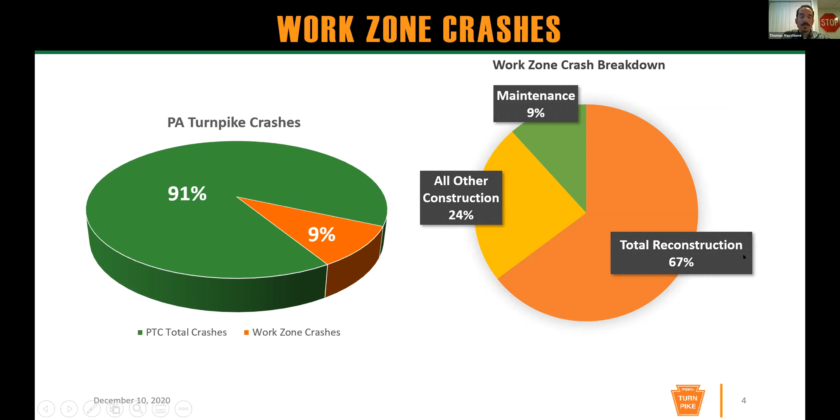We can do this by minimizing exposure to the motoring public through several ways, one of which is improving our operational efficiencies - improving how we set up and tear down the pattern, consolidating efforts, combining efforts of maintenance and construction so we're not having separate patterns in the same general area. Also eliminating any excess or unnecessary work by speccing better products that will last longer and prevent us from having to go out there on the road.

Also limiting operations to times of day when historically traffic is lower. So in a lot of our areas, this would be nighttime work. It does cost something, it costs more, but it increases work zone safety if there's less people on the road traveling through the work zone.

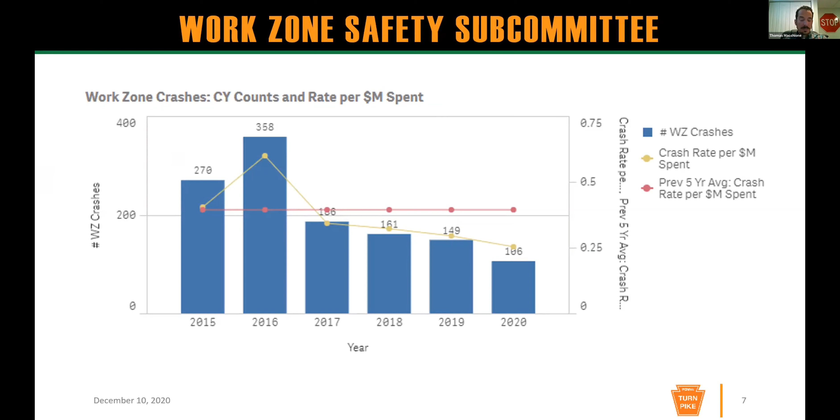This screen here shows our work zone dashboard. This is something that we created in the last year, and we have multiple parts to this. The first phase, which we started first, was a live dashboard that had a map. It shows a map of the whole state, where the construction projects are, whether they're contractor or maintenance, and what type of work it is. It's a direct feed from our ENS system, and it shows you live, up-to-date, where the work is and what's going on.

We incorporated what you see now as our crash statistics. This is what we look at on a monthly basis in our work zone safety subcommittee. So we're looking at crash rates, TMA hits, how many crashes per $1 million spent. We dive into specific projects, and this whole dashboard is interactive, so you can click on things and do filters. What's nice about it is you can dive into one project if you have a specific project you're interested in and want to find more out about where the crashes are happening, or what's the prime crash factor. So this has been a very useful tool.

And then moving forward in 2021, phase 3 will be adding the automated work zone speed enforcement to this dashboard, as we've had that in place for about a year now.

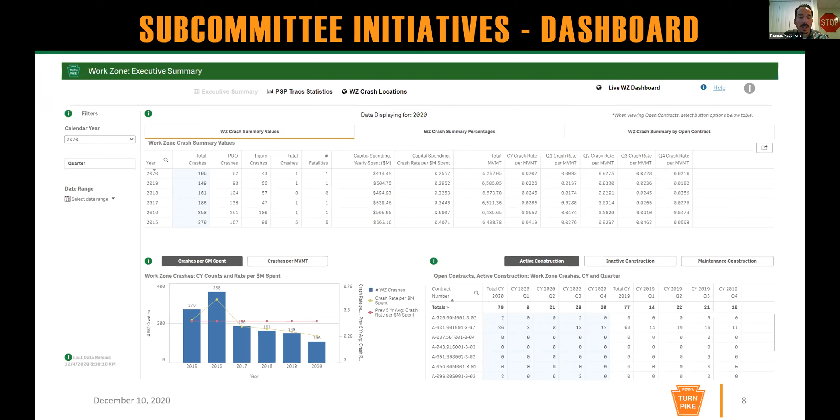We also look at our TMA hits. Our TMAs are truck-mounted attenuators. They're basically a shadow vehicle that has a crash cushion on the back that's designed to take an impact, and it's our last form of defense before the errant vehicle would get to the workers. In recent years, we've seen an alarming rate of these TMAs getting hit, largely due to distracted driving.

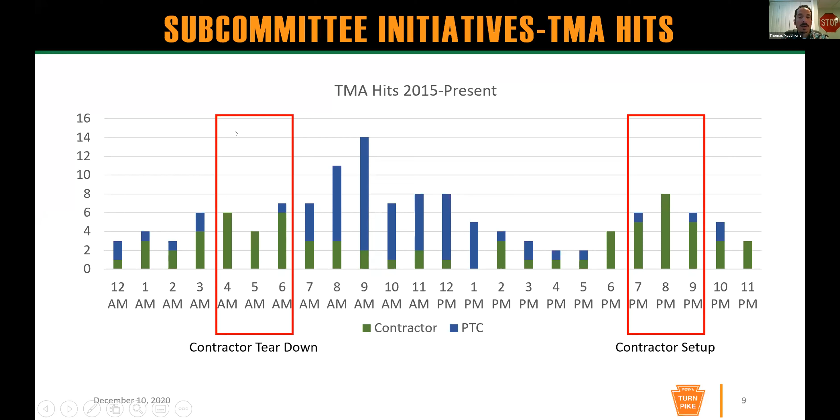So we looked more in depth at when these TMA hits are happening, and who, as contractor or maintenance, is setting the pattern. You can see the contractor set up and tear down - when they're setting up and tearing down, we see increased TMA hits. That's when they're setting the pattern or removing the pattern, while the TMA is out there. They tend to be later in the evening or early in the morning when they're setting their pattern, since they do more night work. Our maintenance crews, on the other hand, are working more like 8 to 2. So you can see, again, when they're setting up the pattern around 8 to 9 a.m. and removing it around lunchtime, noon to 1 time frame, that's when we're seeing our TMAs get hit.

Once they set the signs on the left, they would turn around at an access gate or a maintenance shed, an interchange, and then come and set the signs on the right and then take the lane. So you can see it not only was increasing exposure in the left lane, but it took longer for them to set this pattern, sometimes almost an hour to set up and an hour to tear down because of this loop. Some of our access gates are 5 miles away from the work zone.

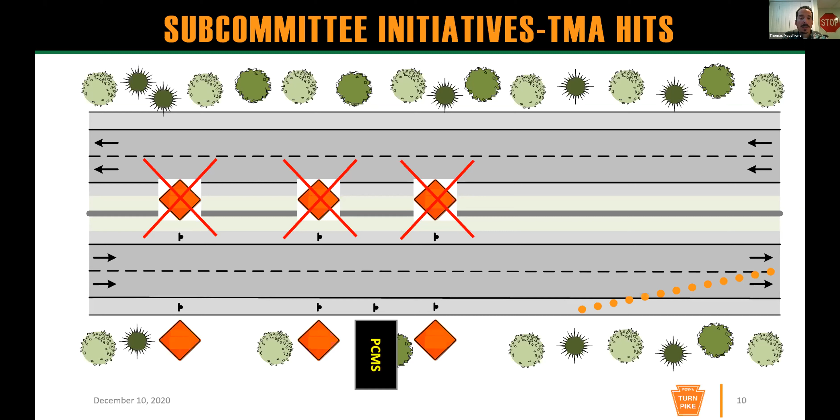So we worked hard over the last few years with FHWA, with PennDOT, and I know they're issuing their new 213, which will have some of these details also. But we initially eliminated the median signs in narrow medians. These were areas where the median was very narrow. It was unsafe to put a sign in the median to begin with, which a lot of the turnpike being built in 1940 has a narrow median, a 10-foot median with a 2-foot barrier, and then it allows for 4 foot to the yellow line.

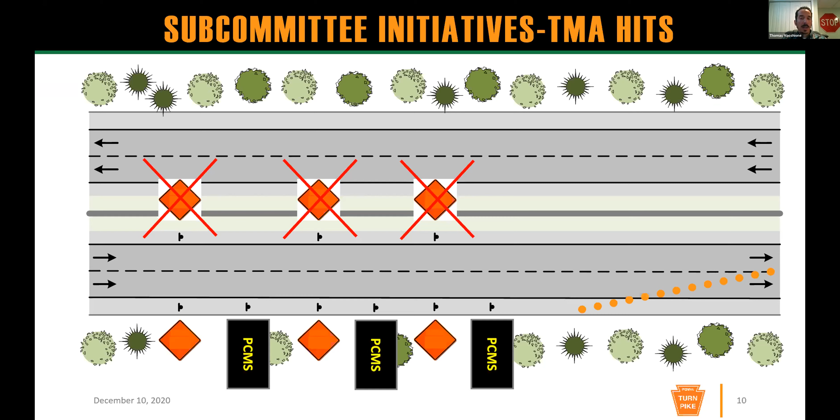So what we did was we eliminated the signs on the left and we added 2 PCMS. So as the customer would see, come into a lane closure, they'll see 3 PCMS indicating that the right lane is closed to merge left.

And you can see here, we implemented these changes first in 2017. 2018 was probably the first full year where we saw the benefits of this, and we went system-wide as well. After we piloted this in narrow medians, in 2019, we made it the entire system. So no matter if you have a narrow median or a wide median, removed the signs on the left.

You can see the drastic decrease in TMA hits. We did have a small spike here in 2020, and that was back in the spring, mostly maintenance operations, mobile operation in the left lane where they were doing sweeping and medial ops. So we actually suspended maintenance and other activity there until we could figure out what to do to prevent these. We actually added to our standard an additional PCMS on the right-hand side to let customers know that the left lane is closed ahead, just to get them to move over.

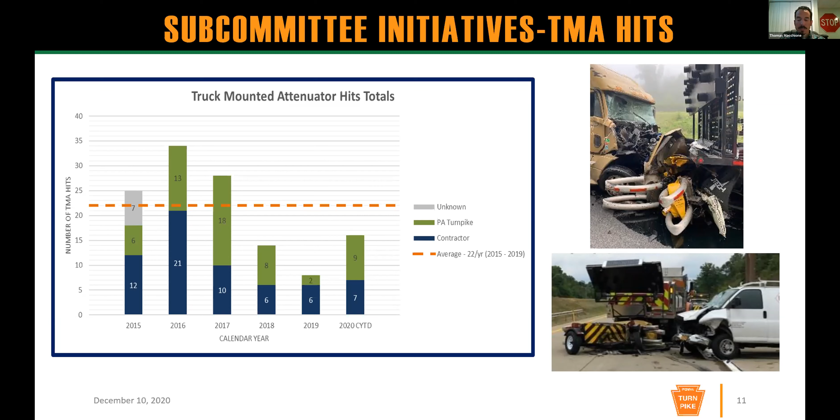So to do this, we have the two main stages. Now, the first stage, we maintain traffic in the existing 12-foot lanes. Stage 2 is our more challenging phase. So this is where we shift traffic to the outside. We maintain the 12-foot lanes, but we're in a narrow, what we call a cattle chute area with no shoulders. So we have barrier on both sides or guide rail on one side, and we paint the lines right on the barrier.

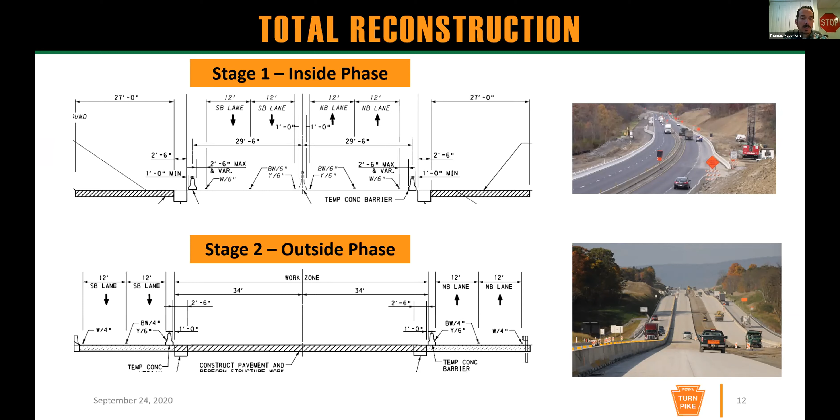This actually becomes very challenging to try and assign this to trucks. So trying to get commercial vehicles, which are now restricted in stage 2 to the left lane only, to be in the appropriate lane. So here are some things which we worked on through the Work Zone Safety Subcommittee, some initiatives to help get the message across to keep trucks out of the right lane. When trucks are in the right lane, things like them hitting the guide rail or getting hung up on the guide rail and crashes with what we call Plan X or turnpike closure occur. So we did extensive work here to try and get the trucks in the left lane, and you can see some of the things we did here.

We added overhead symbol signs to get the trucks in the left lane. We reached out to PSP to get them to help assist by sitting in the work zones.

We actually worked on getting a color portable changeable message sign, you can see on the far right there, with the same symbols. We put down pavement markings in our A31 to 38 project, on the northeast extension between Lansdale and Quakertown, again with the truck symbol sign, and we also used CB Wizard radio. So as the truck driver is driving down the road, they'd broadcast on their CB Wizard radio and tell them trucks, buses, left lane only, and which milepost on the turnpike. So in case they didn't see the sign or couldn't read the regulatory signs for whatever reason, there's an audio message also.

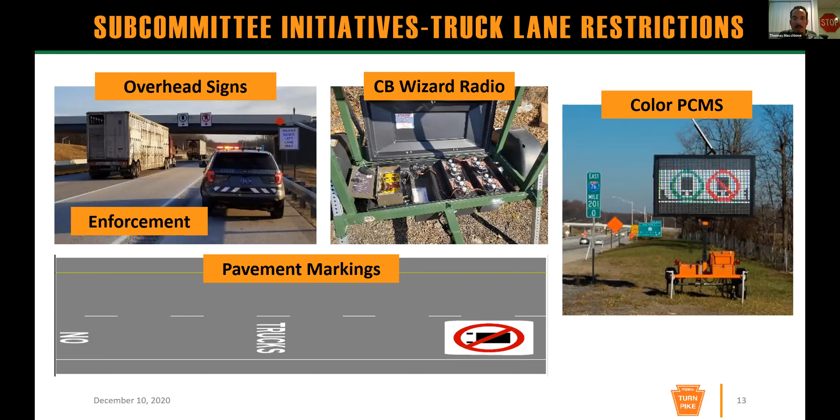This slide shows some challenges we also had in our total reconstruction project. This one was our 202 to 206 project. What happened was the trucks, as they came into the work zone, shifted to the outside for stage 2, and they were consistently hitting this guide rail. So much so that we had to close the road down several times, not just for accident recovery, but for guide rail repair.

Because we're in the cattle chutes here, to get the equipment out there, the post pounder, and put those panels back in, it's too wide to even maintain a lane of traffic, so we had to close the road down sometimes for extended periods of time. And the detour in this area was not desirable. It was from Breezewood to Carlisle. So you can see it's a long detour, and we lost toll revenue.

So we worked on, what you see on the far right there, putting temporary concrete barrier on the right-hand side. Once we did that, we noticed the crashes, we actually didn't have any more crashes in this specific area. We had some scrapes, but the tractor trailers just kept on going. They didn't get caught in the guide rail, it didn't close the roadway.

And what we did because of this, we actually added this to our design consistency guidelines, and we're putting this in our new set of reconstruction projects. We have guide rail on the right side. When we shift into the project for the first 500 feet, we're replacing that guide rail with barrier. And if it happens to be a curve on the curve alignment there as you approach the work zone, we're carrying that through 500 feet through the point of tangency. So the thought is to prevent the crashes from occurring, keep the roadway open. And even though we had quantities in there for guide rail replacement, it's saving the commission on that cost as well.

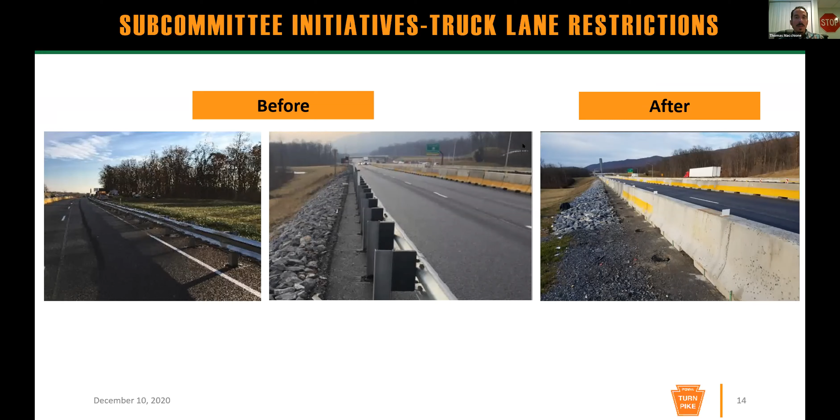Some other things we're looking at for our total reconstruction projects, you can see we put in temporary snaps, these are rumble strips on the right side. We had some issues with our CMVs, the commercial vehicles, driving off the roadway completely, so we put those on there to help keep them on the road. We also put in increased delineation, what we call the candy cane delineation, the orange and white striped delineation, to help delineate the shoulder there so the trucks wouldn't get stuck in the mud.

We also put down durable pavement markings, polyurea, through the work zones to help give wet night reflectivity. And then we put speed display signs. We found that speed display signs can help decrease speed through work zones about 3 miles per hour. So we put 3 of those in advance of our projects, and added to our specifications to have them spaced every 2 miles throughout the project. So if it's a longer project, they're not going to get in the work zone and forget about their speed. We're going to remind them constantly as they're traveling through our work zones.

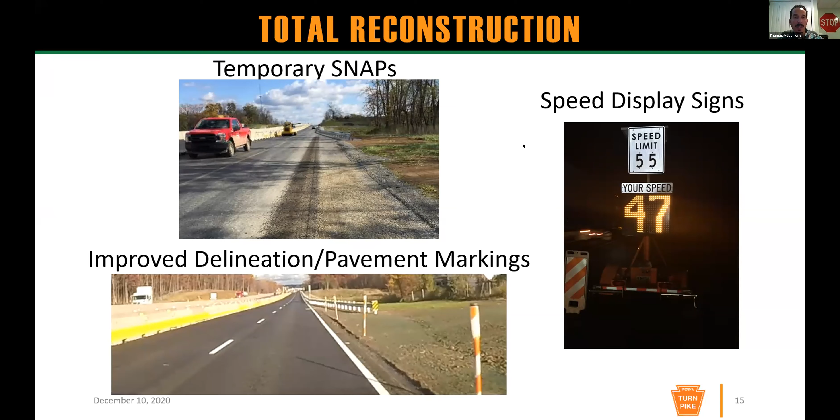Some technology initiatives: we've worked with our navigation apps. We have an agreement with Waze and Google, and we're displaying our work zones in those apps. The Haas Alert is a pretty cool tool, I know Todd Lease mentioned this yesterday. It's basically on our emergency responders or work trucks that have this device, and when they activate their amber light, it sends a notification right to Waze. So immediately, anybody using that app will get a notification that there's a slow-moving or stopped vehicle on the roadway ahead.

ATMS integration, what we're doing there is integrating with ATMS. We're changing our ENS system over, and this will help us get all of our work patterns entered appropriately so that we can get our message boards turned on and utilize our DMS effectively and coordinate with our smart work zones in specific projects moving forward.

And on the far right, you can see our tunnel Swiftgates. If you haven't been through our Tuscarora tunnel project yet, you need to check that out. They're automated gates that swing open and close the lane. Basically, it helps increase operational efficiency and preventing boots on the ground. We have that condition Sunday evening through Friday around midday at Tuscarora Tunnel, so if you drive there through the week, you get to see that in action.

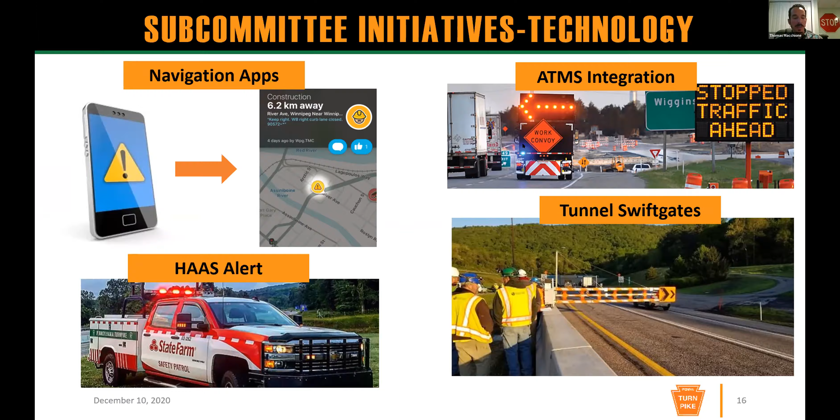More initiatives we implemented: the LED hard hat light there on the right. We issued this to all of our maintenance employees. They wear this at nighttime, and it provides 360-degree visibility to our workers.

We also implemented, on the bottom right there, a sequential cone light. We have these specific lights for our cones in our maintenance patterns, and we also use them on our channelizing devices for our contractors. At nighttime, it lights up the taper, and since it's sequential, it encourages an early merge.

On the bottom left there, you can see our work zone safety memorial. We take that around to different events, and in the center you can see it was at a Penn State game in 2019.

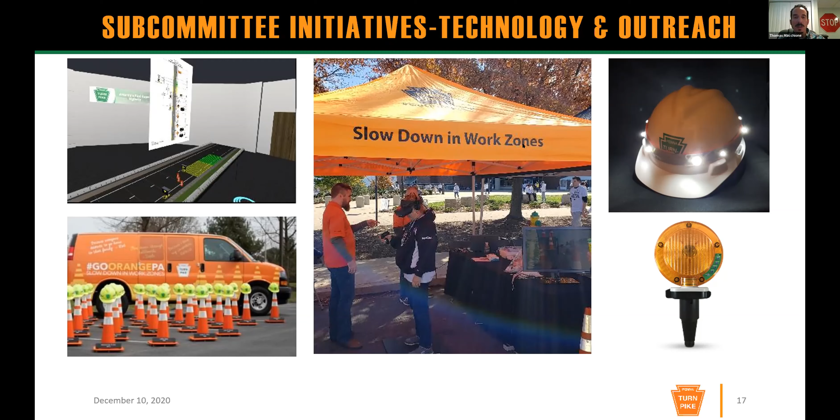We also showcased our virtual reality training, which covered MPT standards. We actually allowed customers to experience what it's like to set and remove cones, so they can understand the exposure our workers go through daily.

I'd be remiss if I didn't mention this: automated work zone speed enforcement has had a big effect on our work zone crash rates. I won't go further into this because Hannah and Ben will touch on it later in the session.

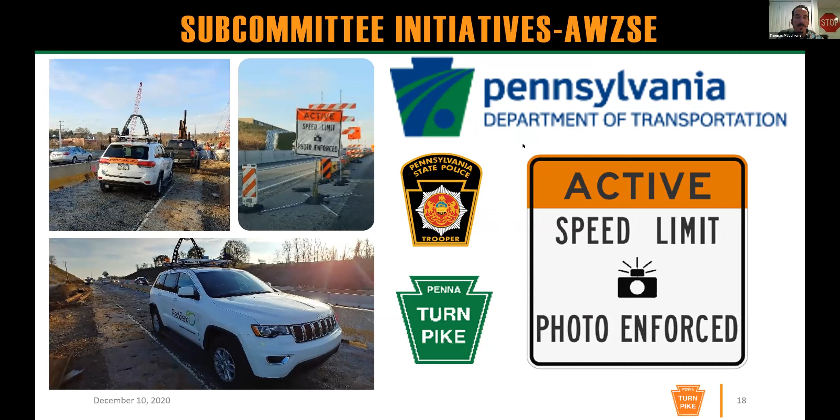Some things we're continuing to work on as we move forward: milled and uneven lanes are something we'll look at further in the next calendar year. We made changes to our standard drawings to show message boards in advance of the milled or uneven lane, and we allow a 2-inch drop-off going into the uneven lane situation.

So we're telling motorcycles which lane to be in—they're probably the biggest customer we need to notify of uneven lanes, but we notify all customers which lane is milled, encouraging them to stay in lane through this condition. Speed limits are reduced to 55.

Moving forward, we're looking at other ways to minimize our exposure in uneven lanes. One option, in areas with high traffic volumes, is requiring the contractor to pave whatever is milled out the same night in our through-lane sections.

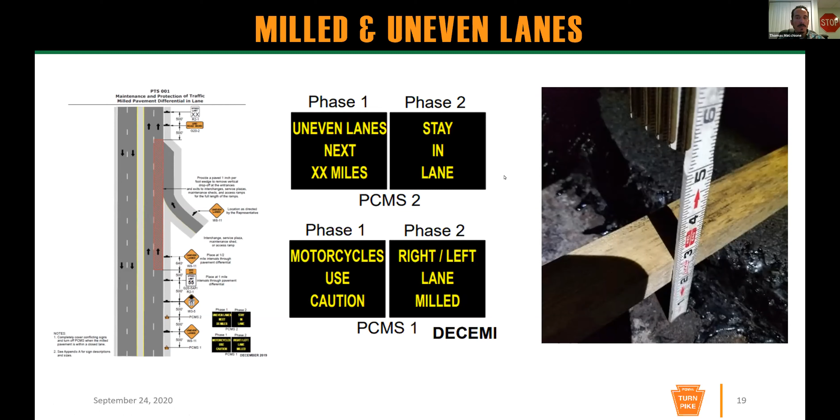Tunnels are another area we're looking at. This can be very tricky. We reduce our speeds, which are normally posted at 70—as you approach the tunnel we go down to 55, and when we go bi-directional crossover, we go 40 miles an hour in the tunnel.

Just to touch quickly on lessons learned, there's a number of things we've learned over the past 6 years, so I wanted to share those with the group. We definitely think the team approach is important.

Not just having a few individuals, but the bigger the group, the more ideas you come up with, both good and bad. You can have things you think are a good idea, and then somebody comes up with a reason why you shouldn't do that.

Focusing the meeting on a single topic has been a big help for us these past 2 years. Instead of having all these scattered ideas, having one single focus topic—like today we're going to talk about utility reconstruction and how we can make those work zones safer.

Adhering to the subcommittee's 5 core principles was big—knowing what our focus is and what we should be focusing our efforts on, and keeping an open mind to all improvement suggestions, no matter how big or small.

Our crash rates were reduced because of the accumulation of a number of small improvements. We created a process to track these improvements over the years to make sure we get them into design projects, and having buy-in and support from high levels of executive leadership is helpful too.

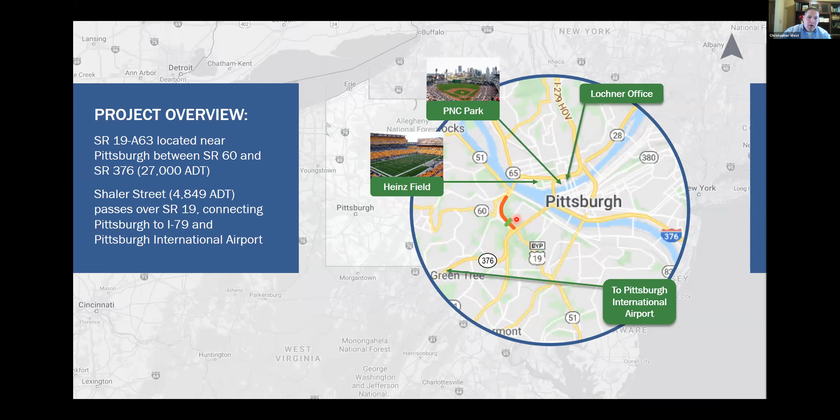The scope of the project includes roadway and structure improvements. The roadway improvements include full depth reconstruction of the 4-lane bifurcated roadway, improvements at the Wabash Street intersection where we extended the deceleration lane to reduce crashes, and replacement of overhead signs near Ramp C. We also made grading changes on State Route 19 southbound and Ramp C under Ramp A. The existing vertical clearance was about 13.5 feet, and both roadways have been lowered to give us the required 16.5 feet.

As I said before, the Shaler Street Bridge was replaced. The existing 3-span bridge was replaced using accelerated bridge construction techniques with a new 2-span bridge. The 2 spans were erected in the bridge staging area adjacent to the project and rolled into place using SPMTs.

There were two main goals on this project at the outset. One was to replace this bridge using only 2 weekend closures, one weekend to demolish the bridge and one weekend to replace it. Another goal was to maintain 1 lane of traffic in each direction as roadway reconstruction was completed.

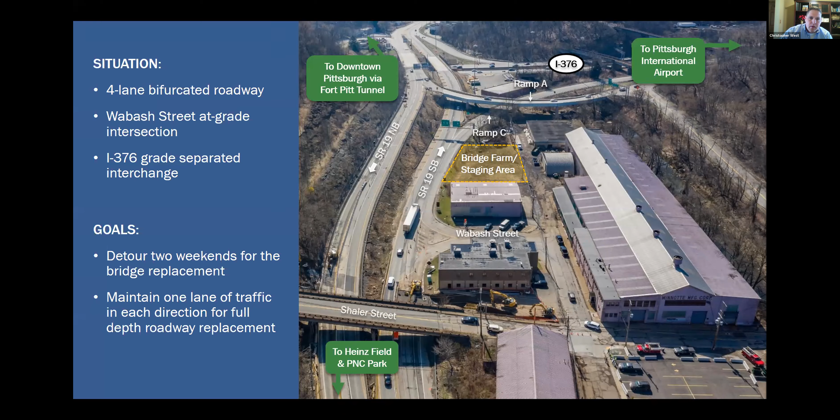It's important to understand that the success of this project was a result of a large team communicating, working well together, and demonstrating what can be accomplished with a partnering approach. There are many stakeholders to this project. During design, Lochner and subconsultant McTish worked with PennDOT to develop the traffic control plan. We met with stakeholders such as the City of Pittsburgh, the Sports and Exhibition Authority, and held public meetings. During each meeting, we discussed the scope and schedule of the project so that there were no surprises and everyone knew what to expect.

Our first example of vigorous communication is demonstrated in choosing the move day for the Shaler Street Bridge. The project was let in 2018, and we anticipated utility work through the winter with major construction beginning in the 2019 construction season. The project specifications did not allow for the bridge move to occur on weekends with special events, including Steeler football games, citywide races, Pitt games, or a concert at Heinz Field. The caveat for contractors during letting was that the 2019 fall Steeler schedule was not known at the time.

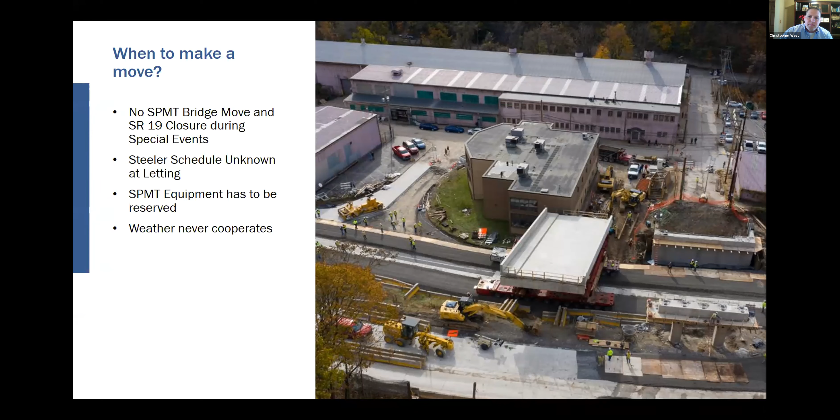During the bridge move, traffic was detoured through the west end. This provided the contractor all the necessary room to complete a large amount of work over a 2-day closure, including placing the bridge move path material, moving two 70-foot spans into place, removing all the stone used to make the bridge path, cleaning the roadway, and opening up to rush hour traffic the next morning.

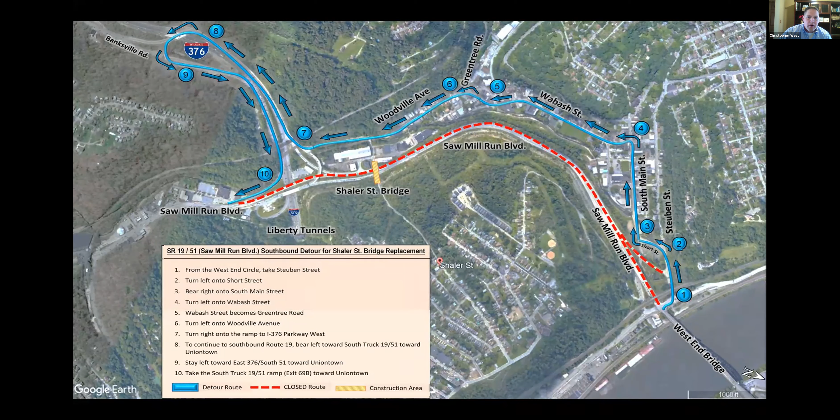So into the project control meeting we went. Folks in attendance included the contractor Swank, with Mammoet on the phone, PennDOT traffic, structures, public relations were all in attendance, along with Lochner, the construction inspection team, and the construction management team, as we came up with a plan for when we could schedule this bridge move.

Our first plan and the first available days that really showed themselves were 2 days over Halloween. We had a few unhappy parents because this was encroaching on trick-or-treat time, but we had 2 clear days in the schedule. Unfortunately, Mother Nature disagreed with this date. Winds were predicted at 45-mile-per-hour gusts, and we had to reschedule the move. Those predictions became true - the wind was very bad over those 2 days.

The second try was November 1st and 2nd. We knew the EQT 10-mile race was occurring in Pittsburgh on that Saturday, and we also knew that it did not use 19 as part of the race path. A little more investigation, and we found out that the race did use the detour route. So that weekend was eliminated as well.

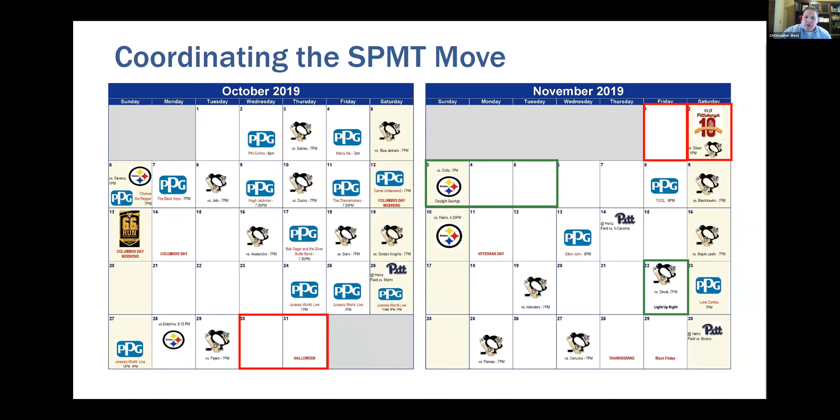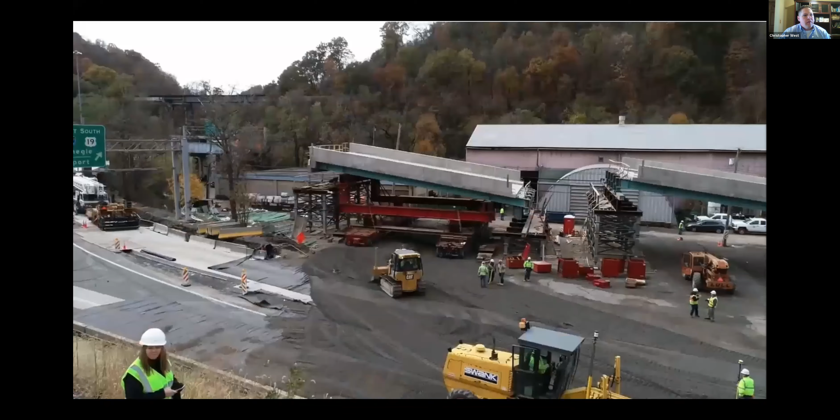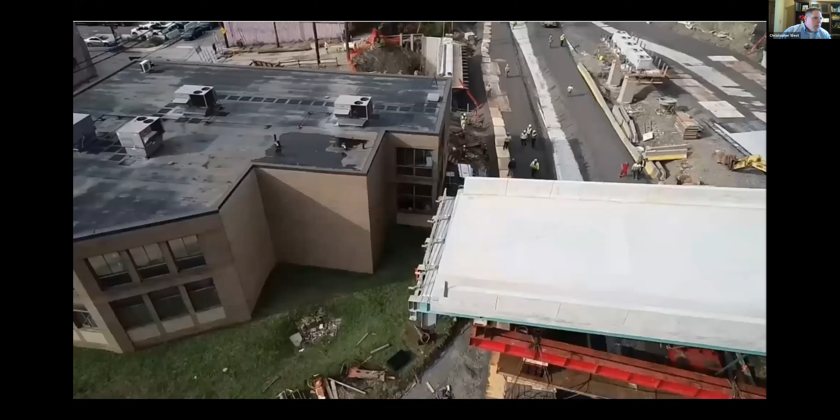You can see in this picture all the move path material that was necessary for the SPMTs to keep the structure level as they were moved into place. The first span they moved was span 2. These SPMTs move at about 4 miles per hour. You can see we had about a foot of clearance through some of the local buildings. Span 2 moved through span 1, past the bifurcated area, and then was moved into its final location.

Span 1 was moved the following day. During the move, State Route 19 was closed, and the contractor had plenty of room to perform the work. However, for the rest of the construction, project traffic operations had to be maintained with 1 lane of traffic in each direction.

Stephanie is here to tell you about some of the plan changes, new ideas, and discoveries along the way that made this project successful. Thank you, Chris, for walking us through that extraordinary partnering with an almost impossible schedule.

The successful coordination of the Shaler Street Bridge replacement using SPMTs over Route 19 typically overshadows the rest of the project. However, the majority of the traffic control plan was required for concrete reconstruction of just about 2 miles of the project.

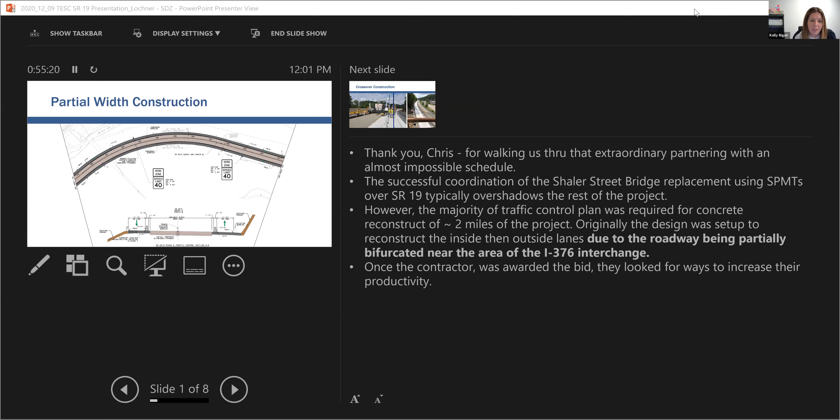Hey Steph, I'm sorry to interrupt, but if you want to switch your screens right now, it's showing the presenter view, just so you can get the right frame in the screen. If you want to maybe unshare or try - sorry to interrupt you. Technology, it's a beautiful thing. And there we have it, perfectly done. Thank you. Thank you very much, Kelly.

All right, so our original design was set up to reconstruct the inside lanes, then the outside lanes. This was entirely due to the roadway being partially bifurcated near the area with the Interstate 376 interchange. Once the contractor was awarded the bid, they looked at ways to increase their productivity.

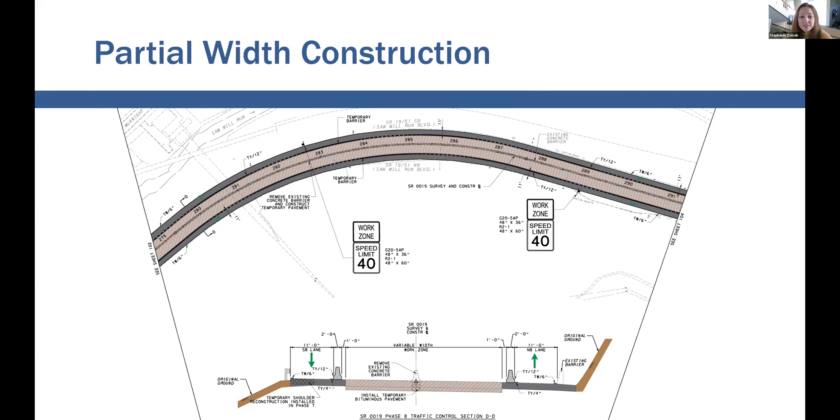The contractor acquired their own designer to propose a crossover in order to work on one side of the road at a time. The original designer and PennDOT quickly worked through multiple reviews and meetings without much time, since the construction clock was already ticking.

Finally, the contractor had received partial approval for the majority of the roadway reconstruction using a crossover. In the area of the 376 interchange, however, with the bifurcated area, the contractor had to continue with the original design concept. The partnering of our original designer, Lochner, PennDOT, the contractor, and their designer was tremendous to approve a modified traffic control plan so quickly. The 3 key benefits to this partnering effort were to keep the contractor on schedule, which was challenging, to allow the contractor to increase their efficiency, and they decided to slip form the concrete.

We also saw an increase for the safety of the workers, since the entire side of the road was closed off to traffic, and this allowed at times for the permanent barrier and the temporary barrier to buffer the workers from the traveling public, in addition to a greater offset from that location.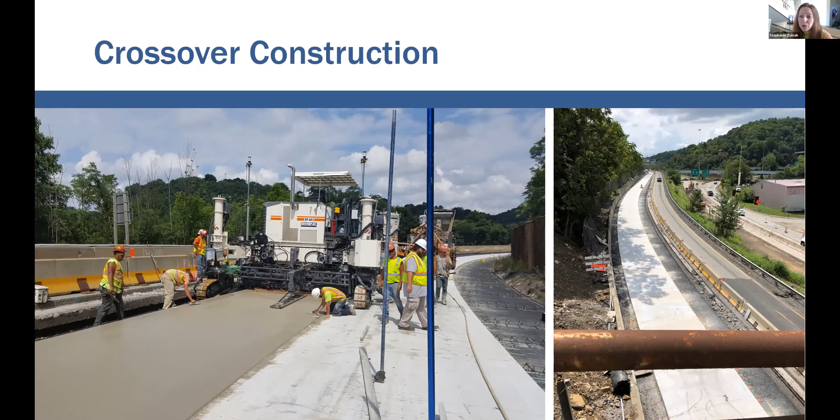Throughout our discussions with the contractor on this crossover, as you can see in the picture, they also wanted to close down Ramp C, which is the ramp that connects Route 19 to I-376, to complete their ramp reconstruction, and also for assisting in their full mainline crossover concept. We did not approve that full request.

So Ramp C, as you can see in the picture, is on the right. And as Chris had mentioned previously, we reconstructed this and lowered the elevation due to a sign showing a low clearance of 13 feet 6 inches. The above structure is Ramp A, which we were not replacing.

So due to high ADT and also the bifurcated section on Route 19, their request for a long-term closure was not approved. The original traffic control design of half-width construction had to remain. However, the contractor again proposed a long-term closure due to what they perceived as a constructability concern. Ramp C was to be reconstructed 5 feet lower than its original grade in order to eliminate a low clearance.

Their claim was that the equipment could not drive the sheet piles needed to support the adjacent lane underneath the structure that you see in the picture. So after much discussion and coordination, a compromise was agreed upon.

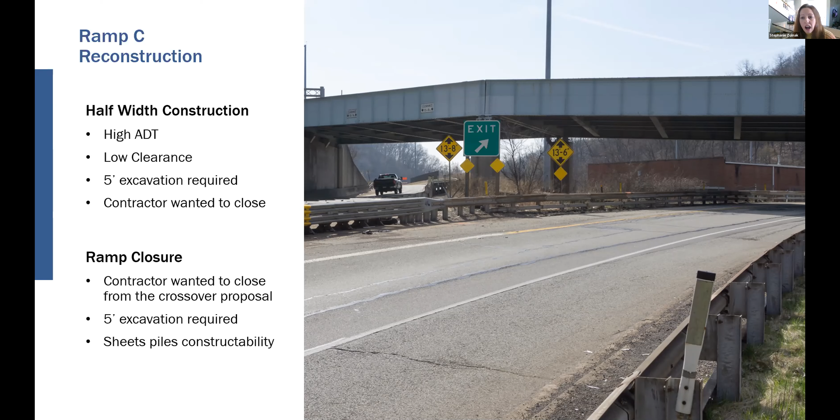Instead of using a long-term closure, which would impact high traffic volumes during our peak hours, we utilized a weekend closure to excavate the entire ramp down 5 feet. Then we placed temporary asphalt on the ramp to complete the construction using half-width setups, just as we originally intended.

This ramp is highly used by the stadium traffic and also the baseball traffic from all the fields, so we had to coordinate with our stakeholders on which weekend we could close this ramp also.

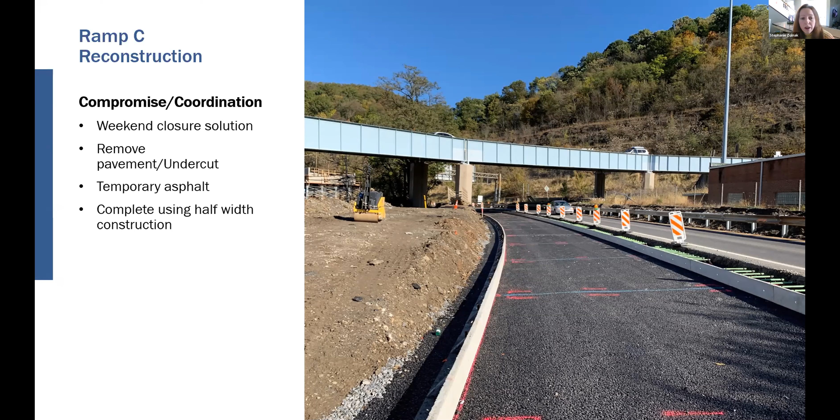All right, and this is the final picture of our great product of the Ramp C reconstructed, and you can also see that the low clearance has been removed.

So this was just another great example of working together with the contractor and the designers to ensure that great traffic operations occurred throughout all of construction, all the while understanding the contractor's perspective of being efficient and lowering their costs. Initially unsuccessful with a long-term closure of Ramp C, which would have greatly impacted the public.

In the end, a weekend closure ended up being a phenomenal success. So we're really proud of that.

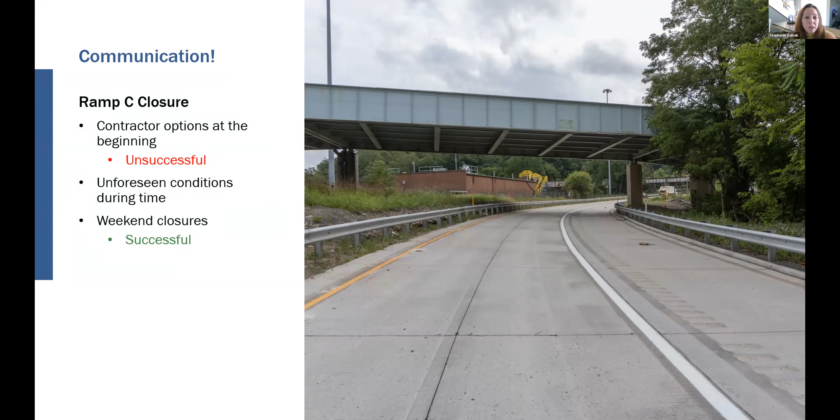The last major partnering effort I'll discuss was quite unexpected. Historically, we saw queues on Ramp A, as you can see in the photo, due to its yielding condition at Ramp C for traffic, and this always backed up onto 19 during peak hours before construction.

So during our initial design, we discussed our concerns that Ramp A now would back up into a construction zone, which decreased 2 lanes to 1 lane, and therefore causing a major traffic flow issue on Route 19. This was also a huge concern from a safety perspective because there's an adjacent off-ramp from 376 that could potentially be impacted, and we could have stoppages of traffic backed onto our interstate, approaching the Squirrel Hill, the Fort Pitt tunnels.

A PennDOT idea coming from our team member was proposed to use the shoulder further up on the ramp as an add lane instead of yielding. We had the room with a shoulder, we just had to reconstruct it. And this has been discussed for a future interchange project, so why not do it now to improve our traffic operations temporarily?

Originally, once the contractor saw the plans, they didn't see the need for reconstructing the shoulder and providing 2 lanes so that traffic could free flow and then merge later up the ramp to reduce congestion concerns. So they proposed eliminating that work. That would both save them time and it would save us money.

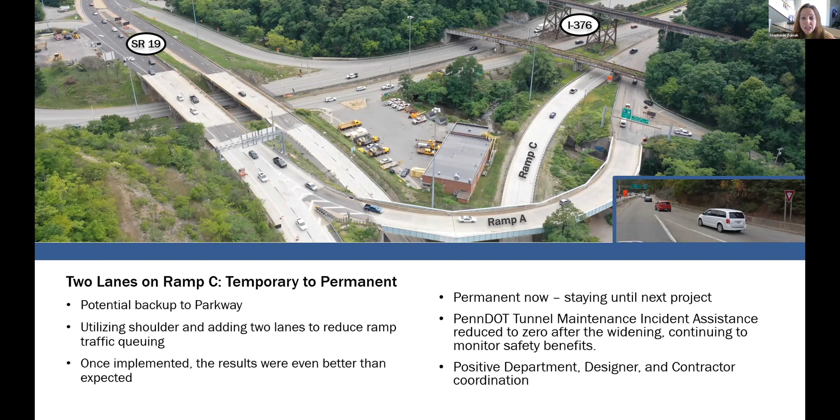So in summary, through all of our construction innovations on this project, all the challenges we ran into, and all the traffic changes, the partnering that we all worked together with was actually the key to our success on this project. Thank you, and I'll pass this over to Kelly Riggett.

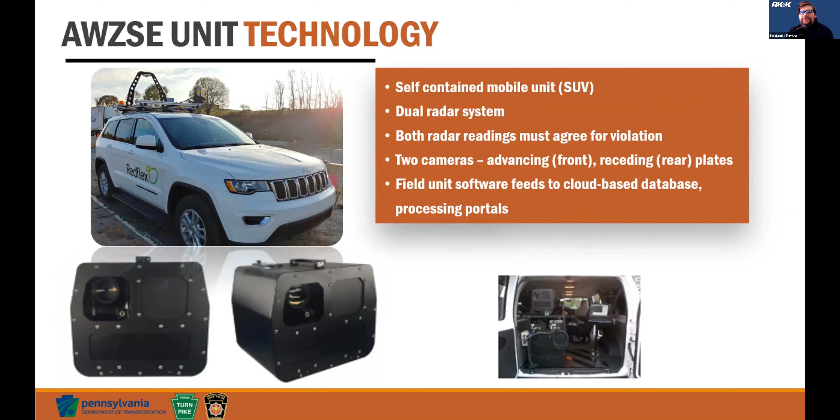There are cameras mounted both in and on the Jeep Grand Cherokee that collect images for any vehicle in violation, and the software uploads to a back office system for violation processing and review. As a reminder, with the AWZSE program, the violation occurs whenever anyone is exceeding the posted speed limit in a work zone by 11 miles an hour or more.

So the process: once a violation is captured by the unit, the speed timing devices detect that excessive speed - 11 miles an hour or more over the posted speed limit. The cameras take both front and rear images of the license plates. The reason we do this, and not just rear, is to capture the commercial vehicles, front plates mainly on tractor trailers, so that we can enforce against all travelers through the work zone.

Additionally, some other states require both a front and rear plate, even on passenger vehicles. If the rear plate is obstructed or damaged for any reason, we can go back to the records and pull the license plate information from the front plate on those vehicles.

Then the responsible party is identified. The legislation defined that the registered owner is responsible for the violation when it's captured - even if they weren't the driver, the registered owner is the responsible party. So we look up, based on the license plate return, both the state and the characters.

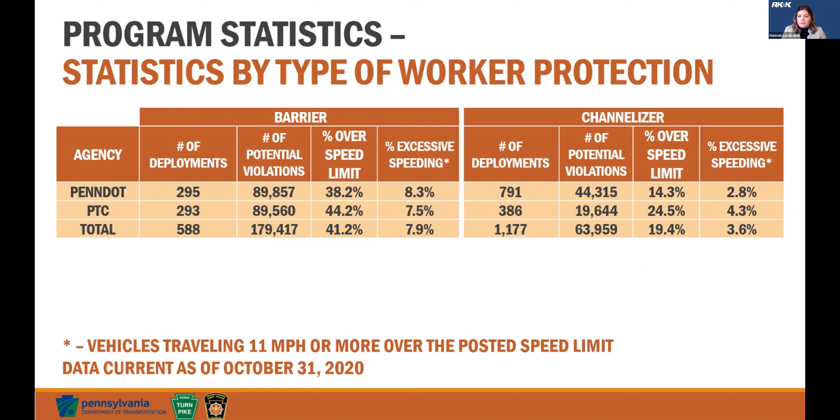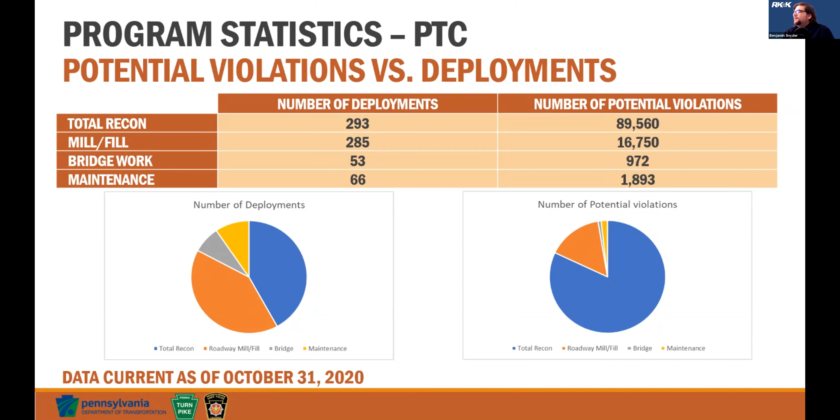So where are we going in 2021? Let's look ahead to some future goals here. With projects, we're going to continue to support a variety of activities. Obviously right now we're into the winter slowdown period, not as much construction activity going on, less opportunities for us to deploy out there due to the active work zone requirement.

Additionally, we're identifying new and existing projects that we can get out to. This year we were really getting going with program startup, so we were more reactive to active projects versus being proactive. Heading into the 2021 construction season, we're able to be a lot more proactive in terms of identifying and assigning deployments to projects.

In terms of operation, as our vendor has brought on more folks for the field staff, there should be smoother operation. They know what coordination needs to be done, they know what questions to ask, they know where they should be setting up with regards to the workers. So that coordination and conversation should be smoother heading into 2021.

Additionally, we were just kind of throwing AWZSE at all sorts of different stuff this year. With that knowledge gained, we know what activities are conducive and which ones are not conducive to receiving AWZSE deployments, and which ones are most appropriate. So that can help with our project selection and screening heading into 2021.

Finally, in 2021, once we hit March and April of next year, we'll have a full year of data under our belt to review and analyze. And obviously the key metrics, some of that data and statistics that Hannah discussed in detail, we're going to continue to monitor, making sure the gains are still being made with this program, and that it's still providing benefit to Pennsylvania motorist travelers as well as the workers within the work zone.